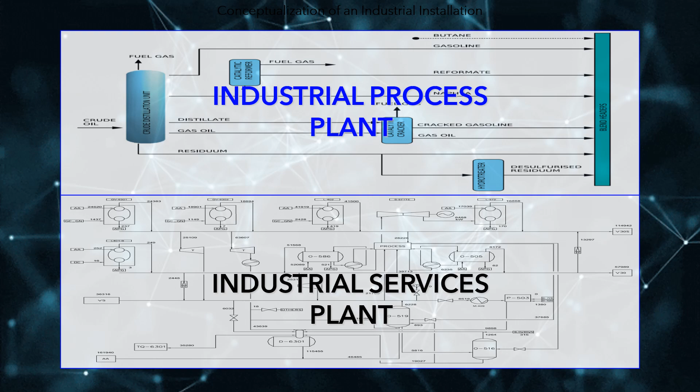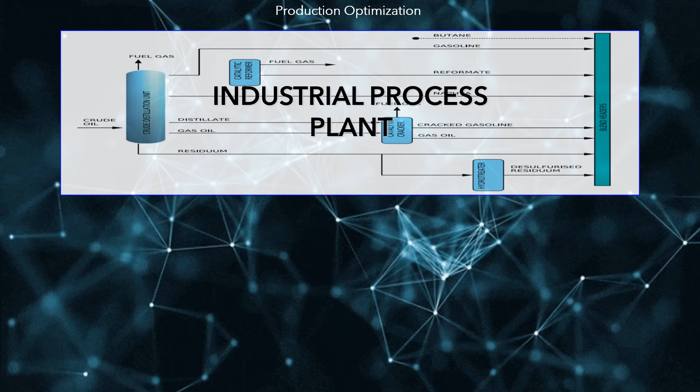To optimize energy efficiency, the first step is to optimize the integrated supply chain, since this is the part of the production process that consumes more economic resources. This lecture focuses on the mathematical modeling of service plants.

HAI-OIL-REF includes a generic model that can serve to plan, at the aggregate level, the crude and/or biomass refining processes. The level of aggregation is fundamentally related to the nonlinearities associated with this type of process, but not with the level of detail with which it is possible to represent the production processes, which can be spatially detailed in all units used in the production of refined products.

The objective of optimization is to determine the production plan that meets the demand for refined products, according to an offer of available crude types during the planning period.

Industrial services optimization is the complementary model to the production model, aimed at optimizing energy management in industrial plants that include large-scale industrial service plants, such as refineries, petrochemicals, oil and gas production, and oil and gas transport.

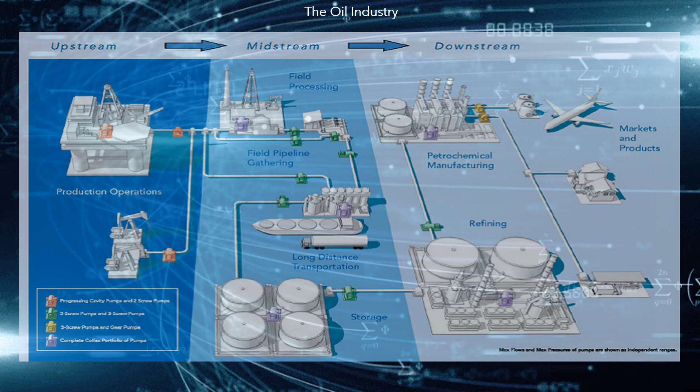The oil industry includes global processes of exploration, extraction, refining, transportation and marketing of petroleum products. The largest volume products in the industry are fuels, natural gas, fuel oil, and gasoline. However, petroleum is the raw material for many chemicals, including pharmaceuticals, solvents, fertilizers, pesticides and plastics.

These services often include self-generation, cogeneration and the exchange of energy with the interconnected electricity system. The objective of the model is to minimize the consumption, or cost, of the energy required by the industrial processes, supported by the industrial services plants.

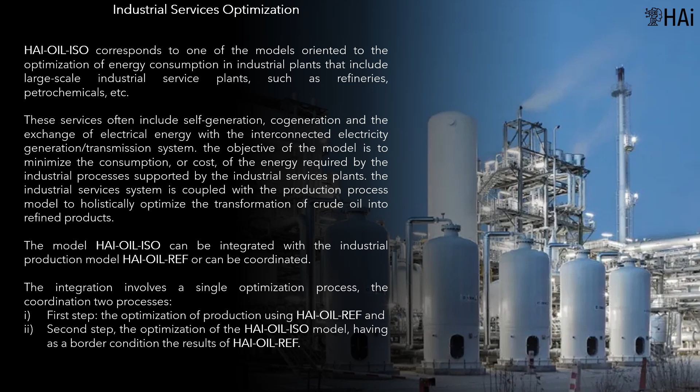The industrial services system is coupled with the production process model to holistically optimize the transformation of crude oil into refined products. Demand fluctuations are typical of utility or thermoelectric plants in petroleum refineries.

Among the major causes are changes in the oil feed properties, multiple operational campaigns, maintenance of process units, interruption of electric energy supply, and cost variations of fuels and electric energy.

On the other hand, utility systems are essential for the operational feasibility of refineries. They must continually adapt their production levels to satisfy such dynamic demand patterns. Therefore, the designs of utility plants tend to present a high level of flexibility, thus allowing multiple operational configurations that satisfy the same demand targets, sometimes with significantly different operating costs.

It is important to note that the operational management of a services plant is a complex process that benefits from the use of optimization technology.

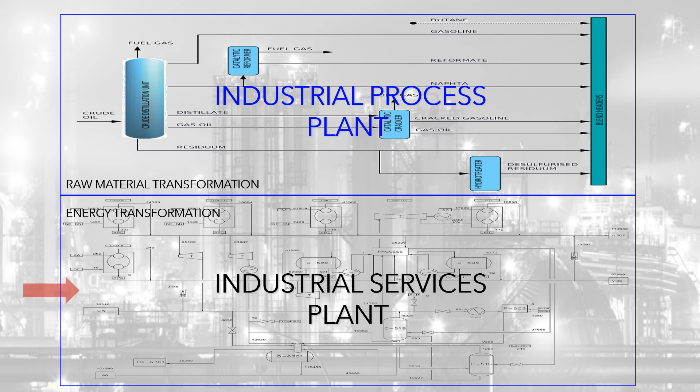The main entities of the system are: process plant, the place in which various industrial operations are developed, including unit operations, to transform, adapt, or treat a particular raw material, to obtain products of greater added value.

Service plant: the place where various industrial operations related to the auxiliary services demanded by process plants are developed. Auxiliary service: essential services for the operation of any production system, allowing the guarantee of quality and continuity of the process. And service unit: facilities that make up the service plant, whose function is to transform the different services to adapt them to the requirements of demand for auxiliary services of the process plant.

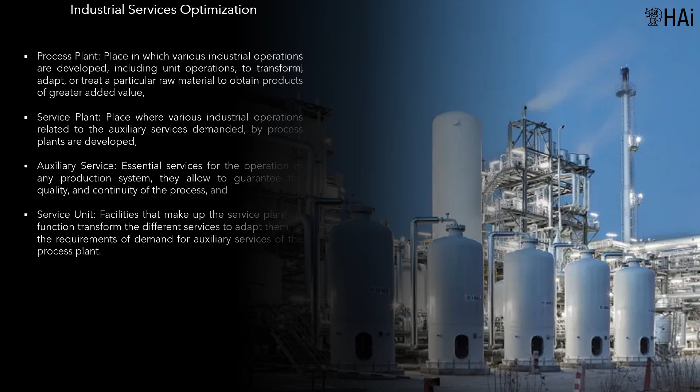The processes that govern energy exchange and fluid dynamics are nonlinear processes. The optimal point of operation of the units of the service system varies depending on the flow, the temperature, and the pressure handled by the unit.

Efficiency is a nonlinear indicator of great importance, with which the amount produced can be related compared to the amount of raw material used. For the management of this indicator, it is necessary to manage an adequate data acquisition system, which ensures the correct measurement of the parameters that facilitate its use.

In service plants, we find different types of units that interact and interconnect with other units to transform one service into another. Different types of service units are used to describe the process, and although the diversity of units is clear, so is the functionality of each of them.

Within the modeling, they will be considered as a single entity, characterized by the value of the parameters that define it. These parameters refer to input, product, and driver. The table presents the main units that make up the service plant, and their basic functions.

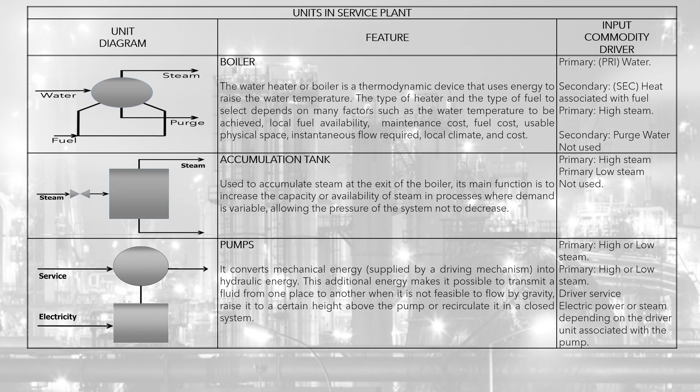Units such as pumps, boilers, accumulation tanks, valves, condensers, manifolds, and steam turbines are specified. There are other fundamental elements for the proper functioning of the service plant, such as measuring units to control operating conditions, including pressure gauges, thermometers, water level indicators, flow meters for steam, and alarm and control devices. These elements are not handled as entities within the mathematical model representing the service plant, but they are of great importance since they make up the data acquisition system, fundamental to the state estimation modeling process.

The image presents the variables that give continuity in the flow in the U boiler. The flow variable is CVC UO UD, where UO is origin unit, UD is destination, and A is service. The process involves 5 units, 2 origins, 2 destinations, and the unit that connects them. The process includes 4 services, 2 inputs, and 2 outputs.

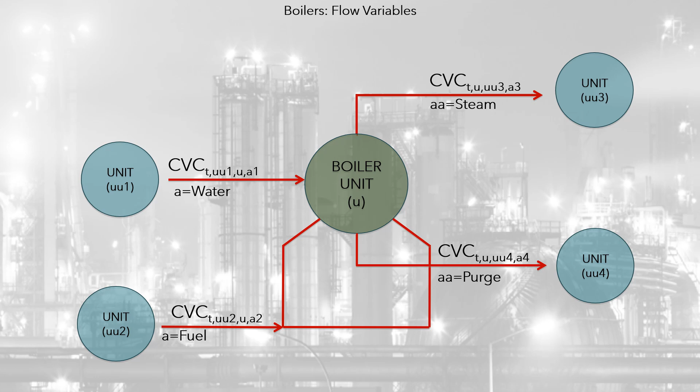The image presents the connection of service units and flow variables. The interaction of the auxiliary services plant with the industrial process plant is carried out through the demand made by each process unit. This demand can be exogenous, when the industrial service plant optimization model is connected in series with the results of the industrial process plant models.

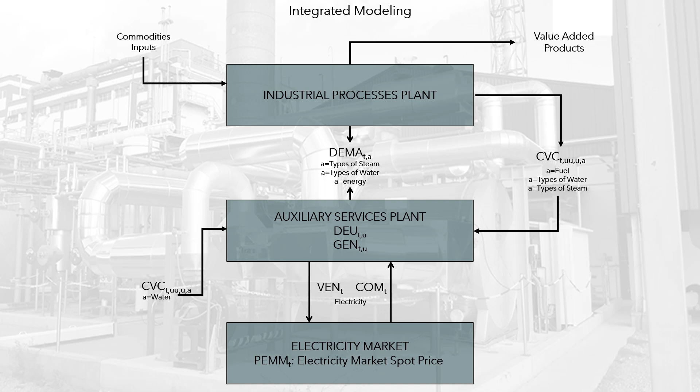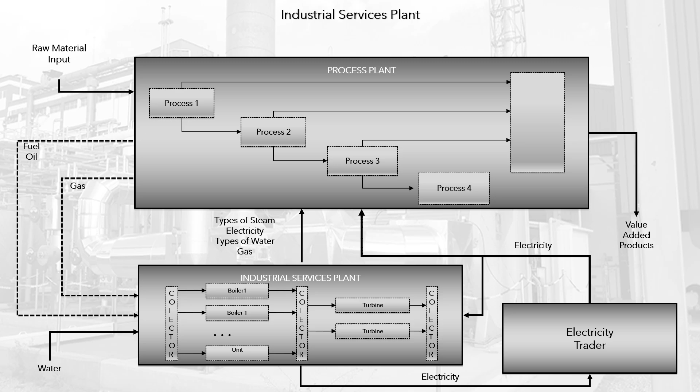This type of connection is called coordinated. If optimization is performed integrally in a single model, the demand will be one of the decision variables of the model. This type of connection is called integrated. Integrated models, if they can be solved, produce greater benefit than coordinated ones.

If optimization is performed integrally in a single model, the demand will be one of the decision variables of the model. This type of connection is called integrated. Integrated models, if they can be solved, produce greater benefit than coordinated ones.

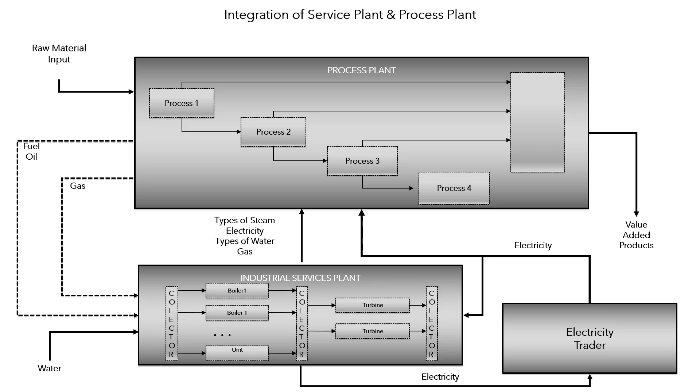In a services plant, service units fulfill specific functions. In the figure, we can see producing units, collecting or distributing units, and consuming units. External services that are not produced in the plant, but supplied in some cases by the process plant, must be considered. For example, the refinery supplies fuel oil, gas, and steam to the service plant, or by service providers, which can be modeled as an external unit.

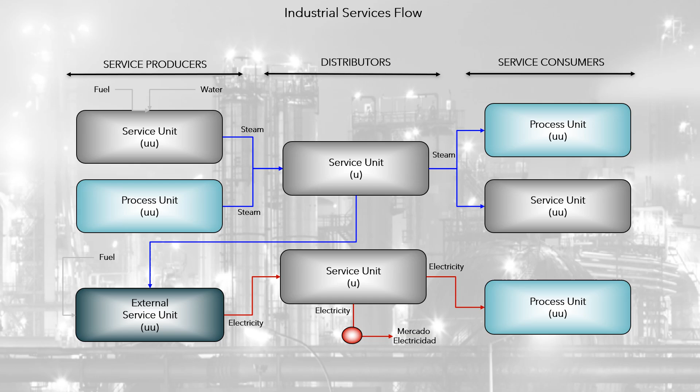In a services plant, service units fulfill specific functions. In the figure, we can see producing units, collecting or distributing units, and consuming units. External services that are not produced in the plant, but supplied in some cases by the process plant, must be considered. For example, the refinery supplies fuel oil, gas, and steam to the service plant, or by service providers, which can be modeled as an external unit.

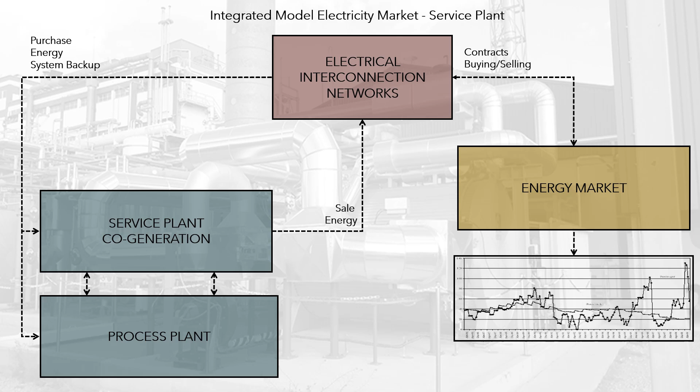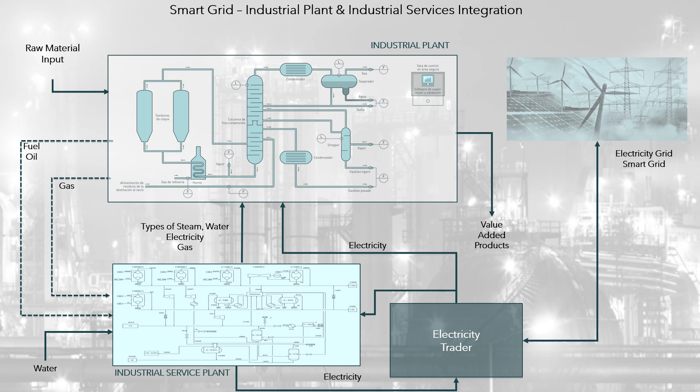The simultaneous optimization of both industrial production and energy conversion is related to polluting emissions of gases and liquids, associated with increasingly demanding environmental control laws. HI may integrate complex industrial process models to redesign the power supply system, according to new power technologies. This type of model includes the simulation of polluting processes to determine the optimal mixture of fuels, in accordance with environmental regulations.

Considering that the energy market allows the integration of multiple factories of different types, all composed of process plants and service plants, it is possible to integrate the entire optimization process, physically integrating the service plants, and virtually the transactions in the markets. This is the real problem of a global and/or multi-business company.

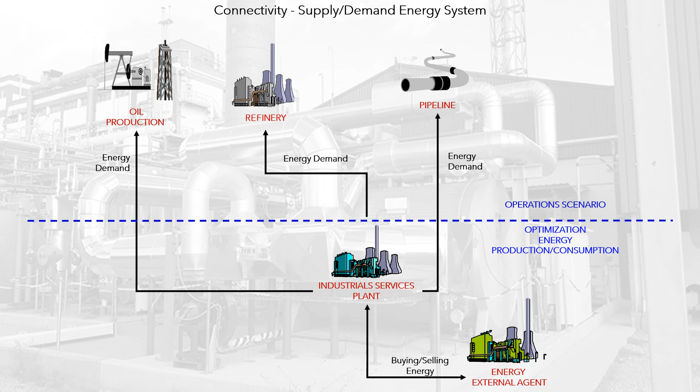Case: Industrial Services Optimization. This is an academic example of the HI ISO model, developed by HI, for a company in the oil sector. The diagram presents the service plant considered for the academic example. The model was applied to an oil production field and its service plant.

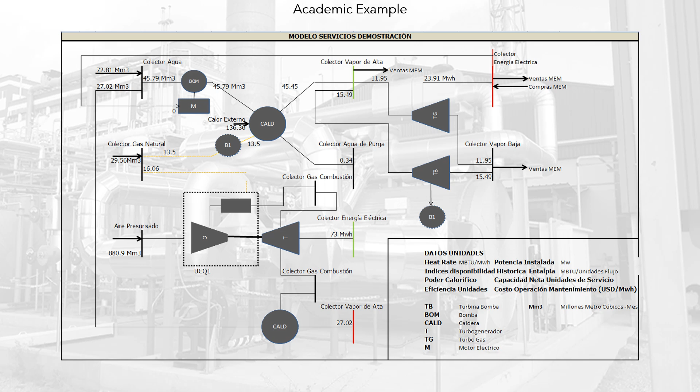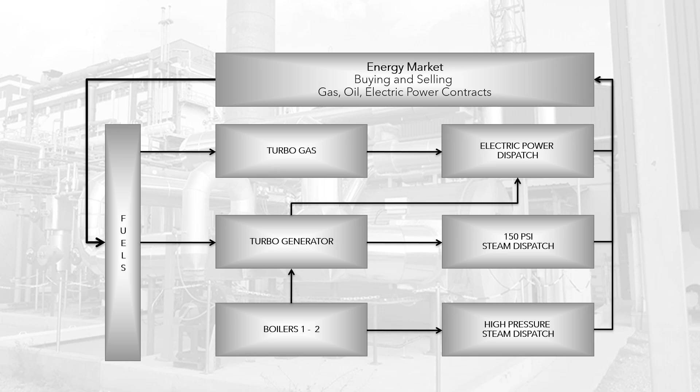The diagram shows the connectivity of the system that provides electricity and steam, and consumes fuels in its production. In addition, it connects to the national electricity grid to buy or sell electricity.

To simulate the electricity demand in the national electricity grid model, each consumption node has its own demand and its own load curve, or load duration curve. In general, it is assumed that a typical day is simulated for each node and for each period of the simulation horizon, to consider daily seasonal variations.

It should be noted that there are no limits on the number of blocks into which the period can be divided. Therefore, multiple typical days of consumption can be dispatched, for example holiday, Sunday, Saturday, and business day. Load blocks can be associated with a sequence of hours, and can be associated with power plants, mainly water edges, for which a daily operation cycle is planned.

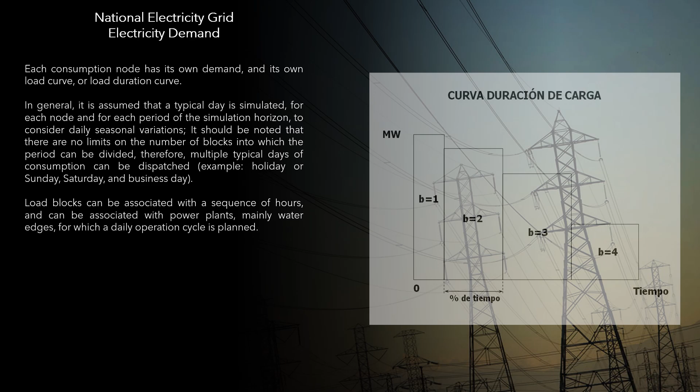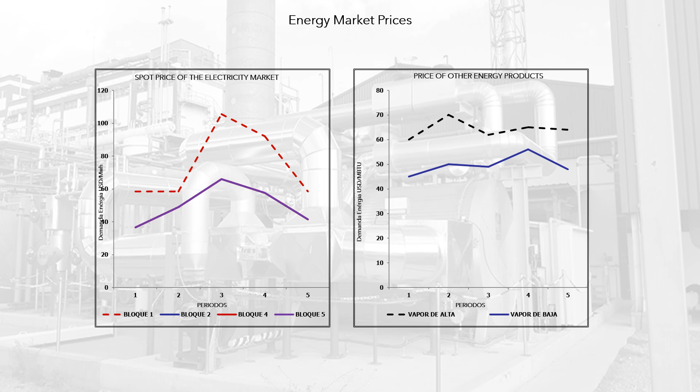In this case, 5 load blocks are considered for each period of the planning horizon. The price of steam is considered constant per period, while the price of electricity is discriminated by 5 blocks. The highest price will be block 1, with the highest load, and the lowest price will be block 5, with the lowest load. The price of gas is uniform by period, but varies significantly throughout the different periods.

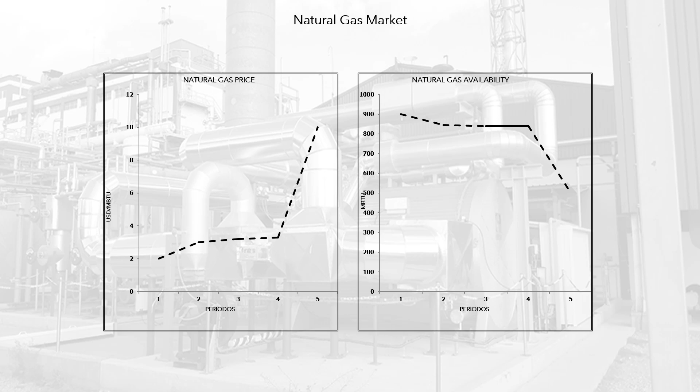The lower the availability, the higher the price. One of the results is the optimal dispatch of generation units, which will vary by period and by block. Since electricity is dispatched by block, the same will be true for natural gas.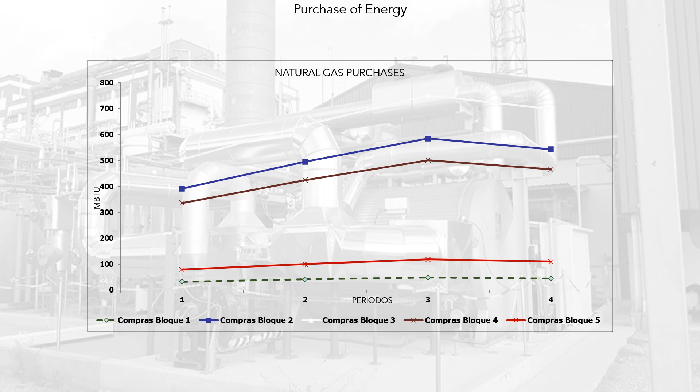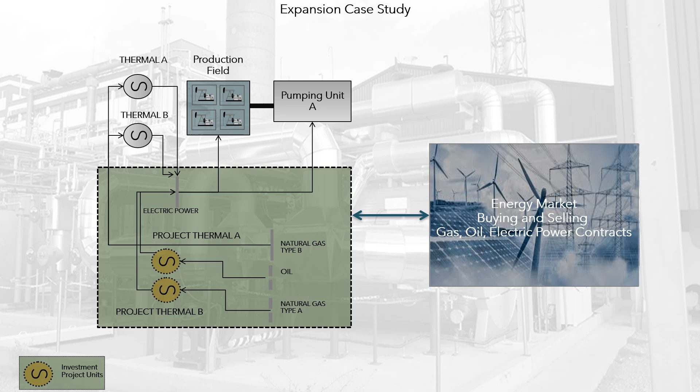Another case in which mathematical models are effective is in the expansion of service plants. In this case, the installation of 1 or 2 additional thermal plants is being studied, and its connection with the national interconnected system. The graph presents the results of the dispatch of the existing thermal plants.

The analysis of the projects was carried out under the following scenario: fuel availability is restricted, and there is a 50% increase in electricity demand projections. For the cost of dispatch, the results were $39.69 million with projects, and $40.105 million without projects. The difference was 1.02%. The graph shows the dispatch of the 4 finished thermal plants. As you can see, project A is not used.

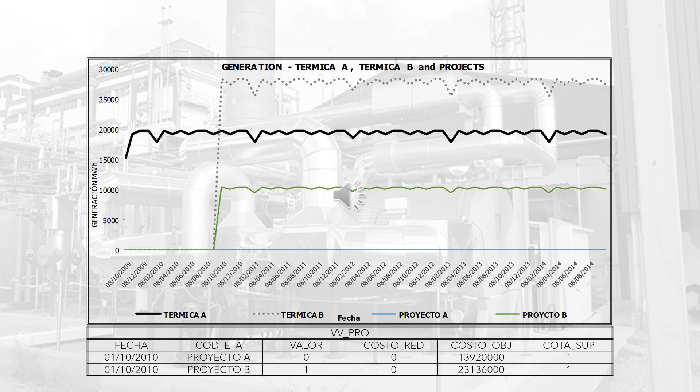Case: Integrated optimization in Petrobras. This case is based on the paper Operational Optimization of the Utility System of an Oil Refinery. Petrobras Recap Refinery develops a mathematical programming model, applied to the operational planning of the utility plant, as well as its interconnections with the process units.

The problem is formulated as a mixed integer linear programming (MILP) model where the mass and energy balances, the operational status of each unit, and the demand satisfaction are defined in multiple time periods. The model determines the operational configuration of the plant by minimizing utility costs, and identifies steam losses as well as inefficient units by comparing the optimal solutions with the current operation.

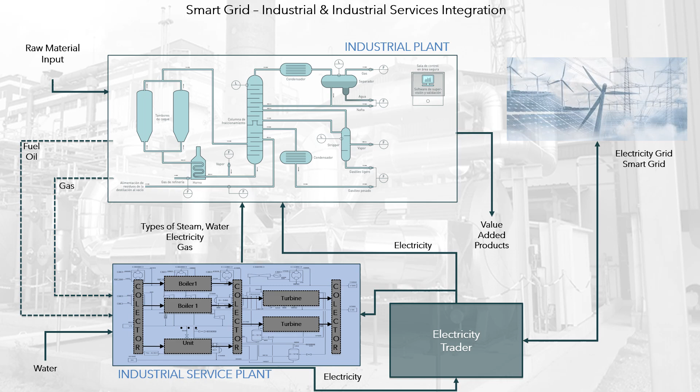The MILP can accurately represent the topology, and optimize the operation of the real-world system, under different utility demands and abnormal situations in single and multi-period scenarios.

Continuous and binary variables are defined for the proposed model. For instance, continuous variables represent the flow rates between the units, whereas binary variables denote the operating state of the unit, on or off. These variables are defined for every period T of the horizon considered. It is assumed that the units and external sources, for example electricity concessionary, can complement internal generation, and therefore supply the sets of variable demands in each period.

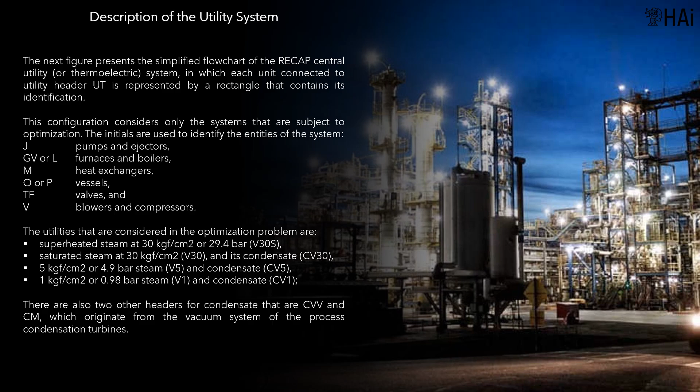Description of the utility system. The figure presents the simplified flowchart of the Recap central utility system, in which each unit connected to utility header UT is represented by a rectangle that contains its identification.

This configuration considers only the systems that are subject to optimization. The initials used to identify the entities of the system are J for pumps and ejectors, GV or L for furnaces and boilers, M for heat exchangers, O or P for vessels, TF for valves, and V for blowers and compressors.

The utilities that are considered in the optimization problem are superheated steam (V30S), saturated steam (V30), and its condensate (CV30), bar steam (V5), and its condensate (CV5), and 0.98 bar steam (V1), and its condensate (CV1). There are also two other headers for condensate, CVV and CM, which originate from the vacuum system of the process condensation turbines.

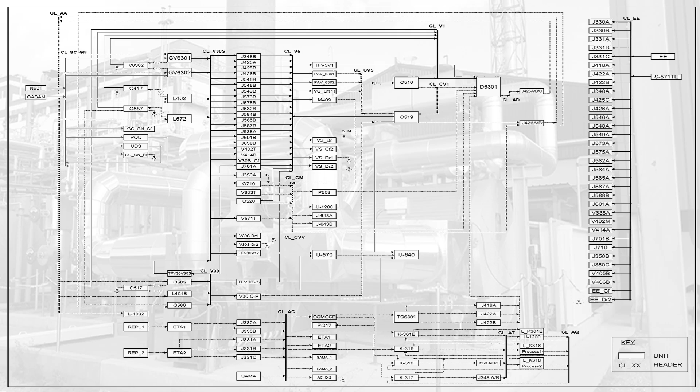For a given header of utility UT, their aggregated values are given as a summation in the term denoted UTCF. An example of the simplifications introduced to represent the headers is shown in the figure.

For the case of the V30S network, each unit is represented by a rectangle that contains its identification, and it is associated to the branch that symbolizes the process area to which it belongs. The minus sign under each rectangle indicates V30S consumption, whereas the + sign denotes its production.

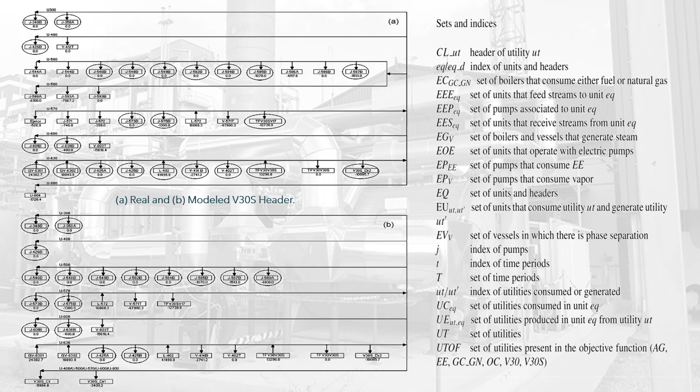Figure 2b shows the modeled system. The variables used are presented in the image on the right side. They are identified by their first letter.

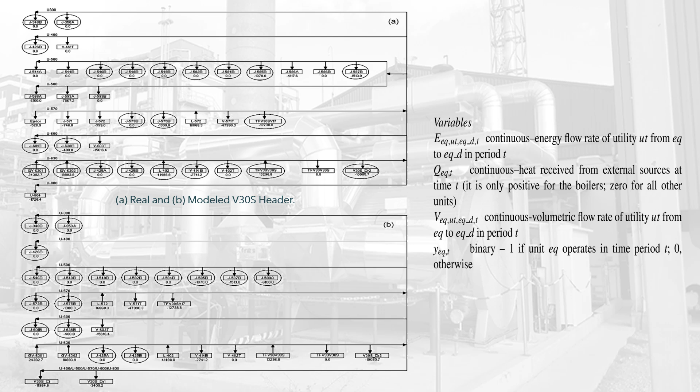E is continuous energy flow rate, Q is continuous heat received from external sources, it is only positive for the boilers, 0 for all other units, V is continuous volumetric flow rate, Y is binary, equal to 1 if unit operates in period T, 0 otherwise. The images present the parameters used by the model.

A unit may produce and consume one or multiple utilities. If a unit produces utility UT, it is sent to its corresponding header. Similarly, if utility UT is consumed in a certain unit, it is sent from its corresponding header. The figure generalizes this idea for every header of utility UT, denoted by CLUT.

In this figure, the utility stream UT that is generated in unit EQ is sent to header CLUT at time T with flow rate VEQ UT CLUT T. This header receives all the streams of utilities that are produced in the same time period from all EQ, which are mixed at the temperature and pressure conditions of the header. Similarly, header CLUT sends utility UT at time period T to consumption units.

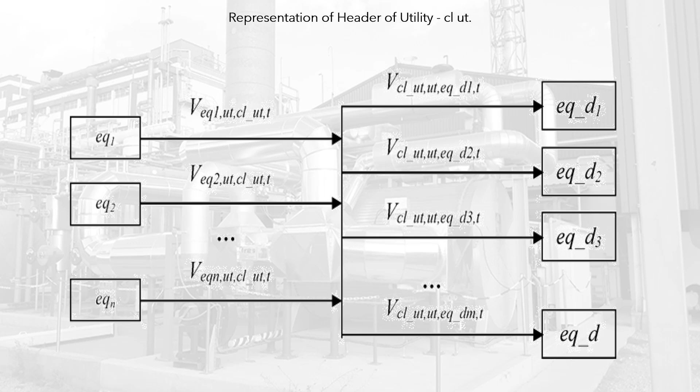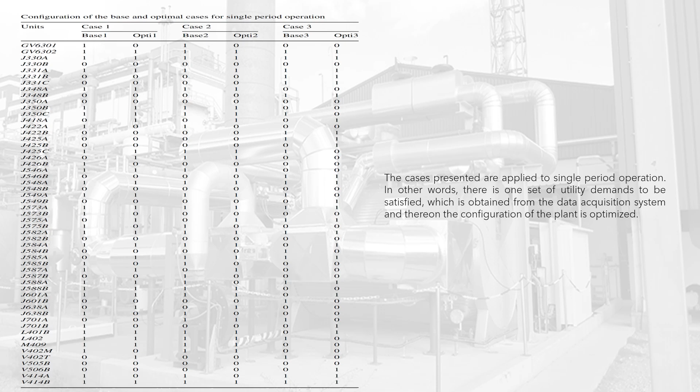In other words, there is one set of utility demands to be satisfied, which is obtained from the data acquisition system, and thereon the configuration of the plant is optimized. Different single period scenarios are considered.

Firstly, the model was validated to verify consistency of the formulation, basically by eliminating the degrees of freedom and providing reference values for the economic objective function as well as for the operating conditions of the optimization model. For this reason, 3 base cases were developed: base 1, base 2 and base 3, that correspond to 3 different operational conditions of the plant.

Cases base 1 and base 2 correspond to operational conditions of the plant in typical days, without abnormalities. The objective in this study is to validate the model, and to evaluate the effect of the manual planning in the operation, in particular its economic impact.

Case Base 3 considers an atypical situation given by the shutdown of U-570, which generates a large portion of EE, as well as V30 and V30S.

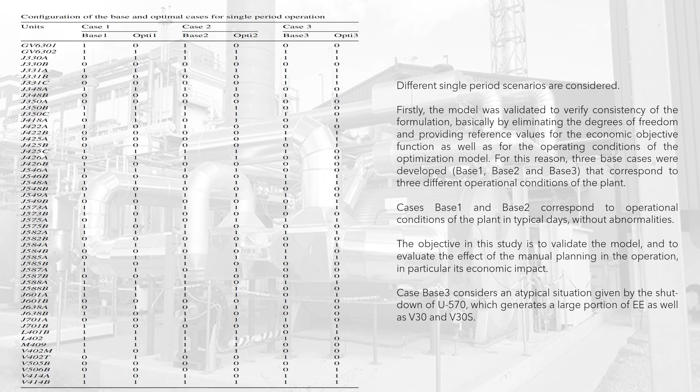The table presents the comparison of the base cases with the solution of the mathematical model. A value of 1 means that the associated unit is up and running.

The table presents the flow rates of the electric energy and fuel streams that can be optimized. It shows the base case and optimal results for the amounts of utilities that compose the objective function, as well as their prices and corresponding operating costs.

The examples show that lower cost alternatives are obtained with the optimization approaches. These alternatives would not have been considered in real-world operation, based on the configurations that are usually operated in the plant. Moreover, these are practicable solutions that satisfy the plant constraints and the set of utility demands.

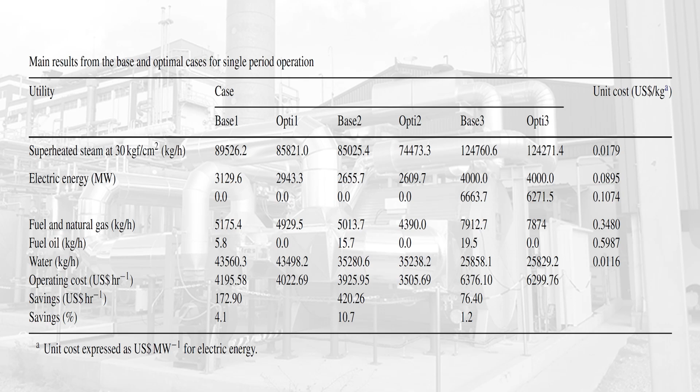In the Opti4 case study, the demand profile results from frequent operational abnormalities, such as the shutdown of Unit US3, loss in the electricity supply from the third-party concessionary that is responsible for 25% of the electricity demand, shutdown of the turbo expander/electric generator unit that satisfies part of the electricity demand, and the shutdown of the L572 heat recovery boiler, which reduces the availability of the steam generated by the recovery of the energy from the process.

Due to unit's shutdown, it becomes necessary to relate all flow rates to, and from, the process units and headers, with binary variables, that represent their operational state.

The model must account for the loss of revenues from shutting down the process units. This is done by incorporating the revenues from the process units and multiplying them with binary variables that denote their operation in each period. The optimal solution for Opti4 is presented in tables, where the flow rates and operating state of the main units are shown for the 4 periods.

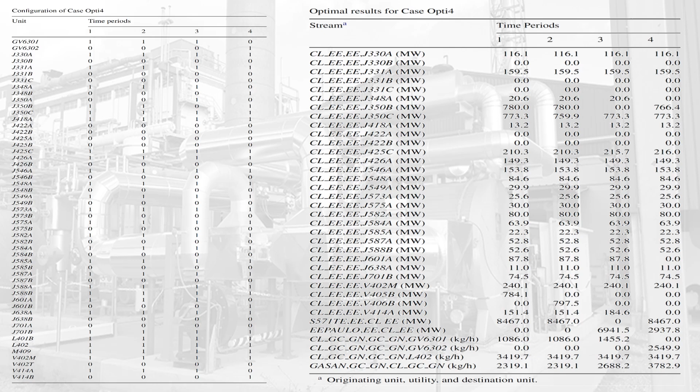The figure depicts the main currents for all periods. The table presents the results of the utilities that are considered in the objective function, as well as their unit prices and corresponding operational costs.

It is important to note that in case 4, as there are many utilities involved in the multiple time periods, it is not straightforward to analyze the effect of abnormal conditions on the operation.

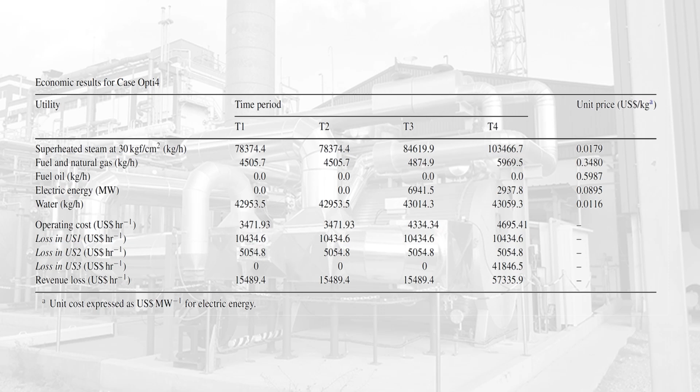The optimal operating costs obtained in time periods 1, 2, 3 and 4 are $3,472, $3,472, $4,334, and $4,695 per hour, respectively. The revenue loss due to the shutdown of Unit US3 was $41,846 per hour. Finally, the last case study presented consists of a problem with 12 periods.

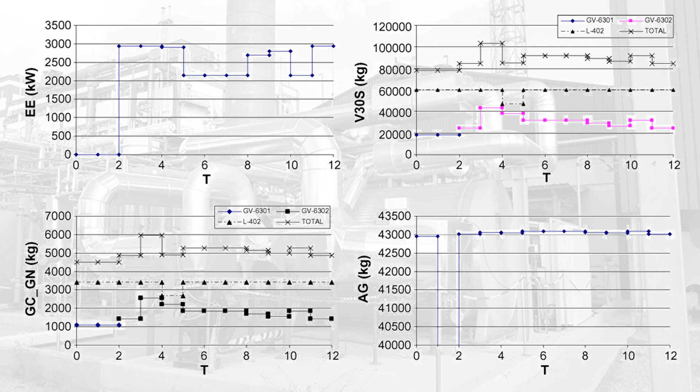The next step is to energetically integrate the system, with the entire refinery, to further improve the operation of the system. More complex multi-period scenarios were studied that consider the existing flexibility in the industrial plant.

These correspond to changes in the operating conditions and in the configuration of the processes, interruption of electric energy supply from the local concessionary, equipment shutdown, for example, propylene unit, turbo expander electric generator, and results in a variable utility demand along the time periods and generated an average savings of 3 to 5%.

The MILP is currently integrated with the refinery database for the planning of the refinery utility system and effectively optimizes the financial performance of the thermoelectric plant with no capital investment.

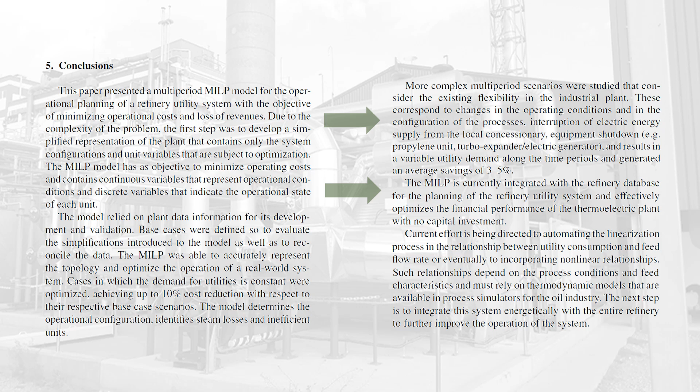The Petrobras mathematical model can accurately represent the topology and optimize the operation of the real-world system under different utility demands and abnormal situations in single and multi-period scenarios.

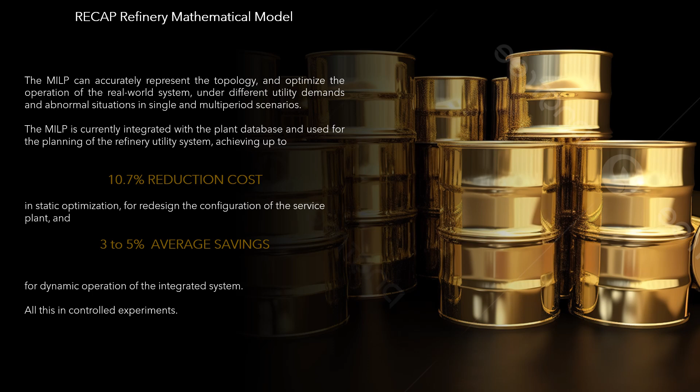The model is currently integrated with the Petrobras plant database and used for the planning of the recap refinery utility system, achieving up to 10.7% reduction cost in static optimization for redesign the configuration of the service plant, and 3 to 5% average savings for dynamic operation of the integrated systems. All this in controlled experiments.

Like Herbert Simon, Hypothalamus Artificial Intelligence believes that computer-based mathematical modeling is the greatest invention of all times.